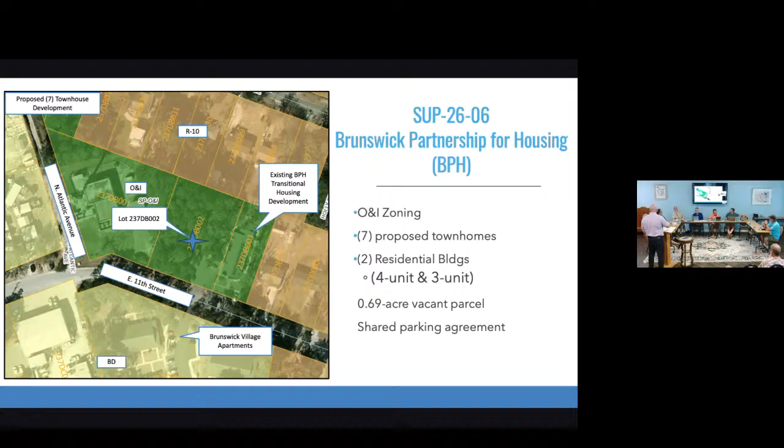So that is where -- geez, no, that's my problem. I was trying to fix the screen so you guys aren't seeing nothing. Well anyways, it's to the southeast of the subject lot.

Site locations. Sorry, can you go back on the slide? Okay, thank you, now we're on track. Site location: the proposed development is located along East 11th Street near North Atlantic Avenue.

It is served by existing utilities, and is outside of the special flood hazard area. It resides within the Office and Institutional zoning district, and is adjacent to the northwest and southeast by other O&I zoning district parcels. It is predominantly surrounded by residential uses, with R10 zoning to the north, and even though to the south is BD, that is the Brunswick Village Apartments, which is also residential. So it is predominantly surrounded by residential development.

Here we have 10.3.1 of the UDO. What we're really looking at here is the land use, multifamily dwelling, cross-referenced with the zoning district that will be incorporated, O&I, and we see the SS. For the audience that doesn't know, SS means in this situation that it is required to have special use permits, and the other S is that there are specific use standards that must go with this proposal, which we'll find at 3.7A of the UDO.

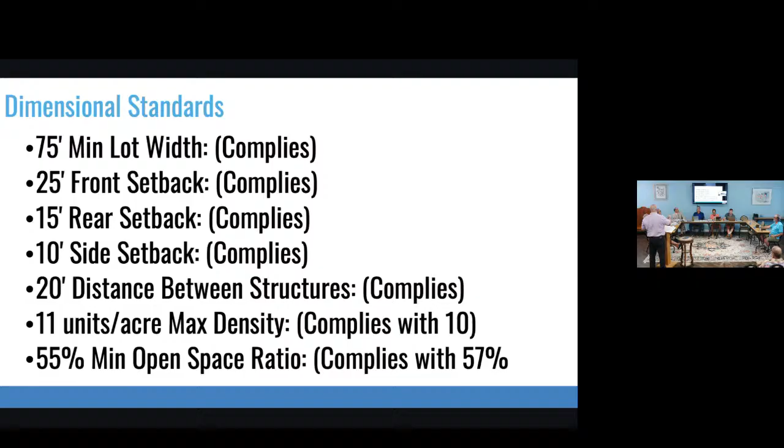So let me show you real quick. Basically, it's going to look like this from East 11th Street.

That's the street-facing side on both of them? That's the street-facing side, yes, sir. And building two, the 3-unit, that's the building closest to 11th. Yes, that's building 2 — you're standing in the middle of 11th looking at that, and that's what you see. Correct, on building 2, so that's facing us. So all that is to say they went out of their way, redeveloped, and came up with this proposal so they could be in accordance with the UDO standards.

While we're here, I'll show you the elevations that we have. This is building 1's elevation — as I mentioned, it's 4 units — and there's the side view of it. And here's building 2, again the front view up top, and the right elevation on the bottom.

Staff findings: the proposed development is found to be consistent with the O&I zoning intent, provides needed housing opportunities, meets density and dimensional standards, is compatible with the surrounding developments, and provides adequate parking and circulation. Staff recommends approval of the special use permit as the development is presented. If issued, the applicant will go before the June 18th planning board for the major site plan review, and I can answer any questions regarding the presentation or staff.

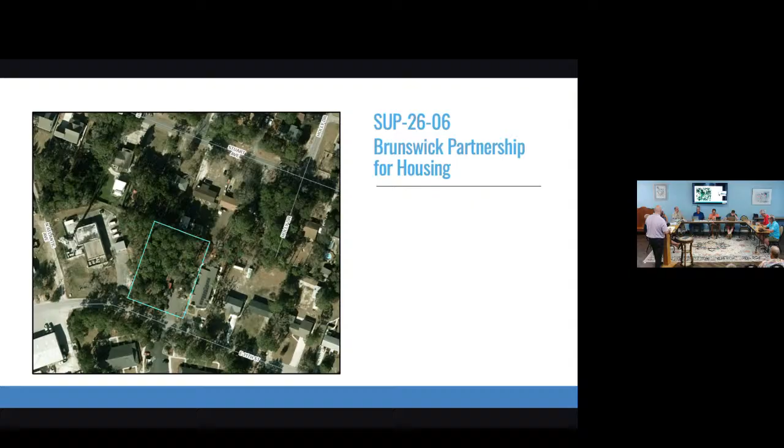Will the existing building now become part of the entire facility? Do they have access between the two? There's common sidewalks. The existing building on that parcel is going to remain separate, its own entity. They are owned by the same property owners, however, Brunswick Partnership for Housing owns both parcels.

If people are parking, are they going to park in the 23 parking spaces and go into the existing building? They could, that's what the parking agreement I was discussing earlier covers. As for sidewalk access, yes sir, there is sidewalk access.

Looking at trash, that was another thing we had to work through, that the developers worked through as far as design goes. We've run into a couple of problems with it. I believe, and they will correct me if I'm wrong, the trash is going to be individually placed in the back. I believe these are the receptacles for the trash right here. Is that correct? Yeah, rather than one primary receptacle.

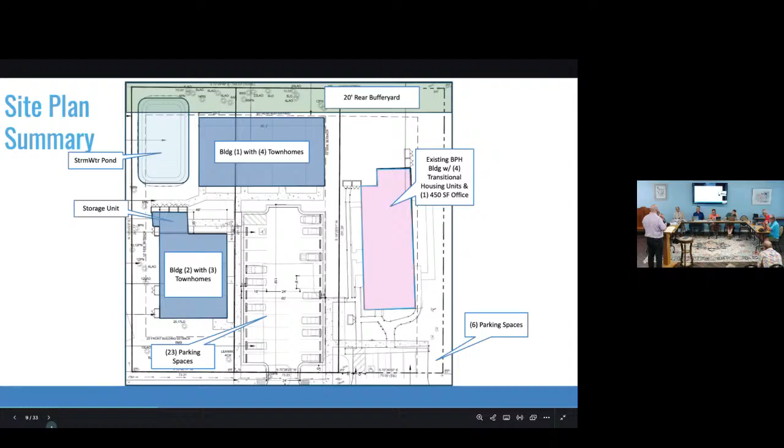What access is there, 11th Street or North Atlantic, how would they get to it? That would be the west parcel property line, let me show you. Is it a dumpster? They're going to be individual receptacles.

The problem we ran into is you can't have a dumpster in the front of the property, but there's no real location since they want to save a specimen tree out on the front property line. So they had to play with the design a little bit to accommodate that. If you look at the subject parcel, the left property line, that's where the trash will be facing. But again, they're going to be individual containers, not dumpsters.

Where's the road to pick it up at? They're going to wheel them down, there'll be a wheel-down truck. So all along 11th Street will be where they wheel it to?

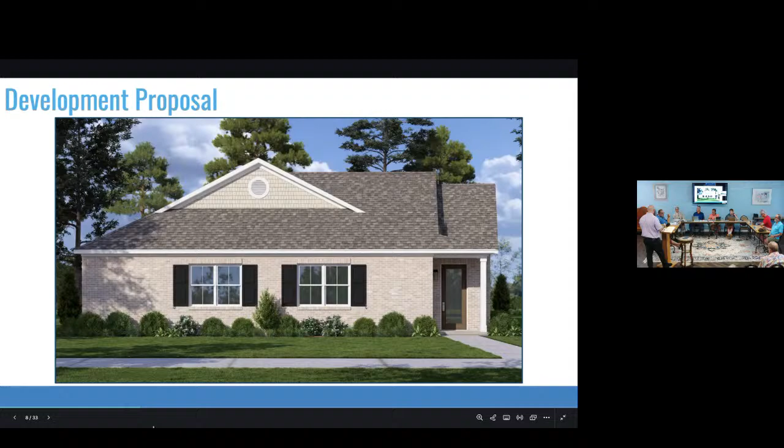Okay, I need to withdraw my question about the drainage. Got turned around in my head and thought we were on the other side of the street. I'm sorry. All right, Michelle.

What's that next to the left, going west, northwest? Oh, I don't know the full details, it's like an AT&T cellular transmitter. There's nothing residential there.

Because it's O&I, there's not a required buffer yard between it and the proposed development. However, because the northern properties are zoned R10, there is a 20-foot required buffer yard between the O&I and those parcels that they've accommodated.

Well, if that's all you have for me, then by all means, I can hang out for more. Yes sir, we've got plenty. By all means, just so you know, our applicant also has a presentation and they can speak more about the design and engineering side of things.

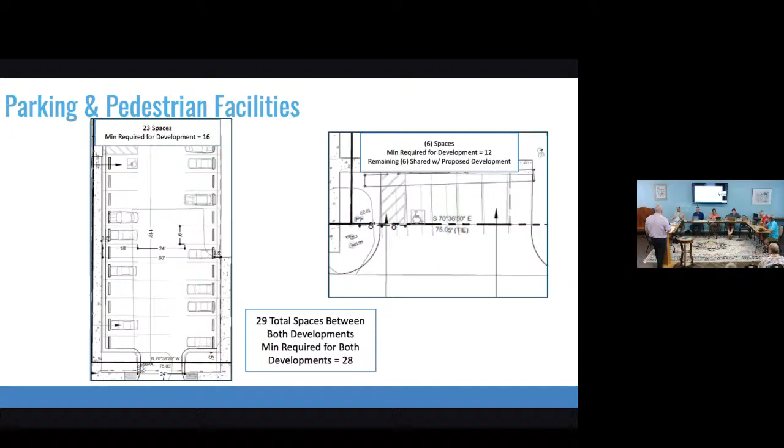Even though Jason withdrew his comment, it did raise a prompt for me. Could you go back to that image that shows the lot numbers, early on, it's got the trees and all that in plan view. If there was an easement to the north of the property, it would show. Like if there's a drainage easement, I just wanted to make sure it would show up on that map. That would be the map where it would show, right?

On the north side, where they show the 20-foot buffer, that green buffer, beyond that, if there was a storm drainage easement, that's where it would show on this map if it had been dedicated. That's why I wanted to clarify, when Jason mentioned it, I just wanted to go through that.

So the existing facility is transitional housing, if I'm not mistaken. The proposed is not. Just want to make sure. I think I read in here, and I'm not trying to go back in time and encumber the transitional development that's already there and in use, but we've had some issues come up before with what's going on with neighboring lots, parcels and uses. I think it's in here somewhere that transitional housing requires a rear fence. I just want to make mention of that.

So when you go through and start looking at that buffer treatment, and don't hold me to it, but I think there is a requirement for the rear yard of transitional housing to have an 8 foot tall fence. You can correct me if I missed it, but I thought I caught that in here somewhere. That's why I wanted to ask whether or not the new one was also going to be transitional housing.

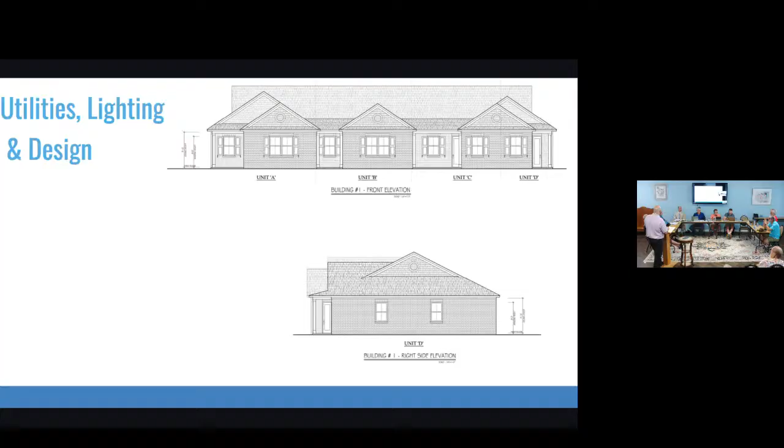So the setback is 15 feet. But because they're adjacent to an R10 lot to the rear, they need a buffer yard of 20 feet wide. I think that's right. Yes.

Give it, take it away.

No, I know. Okay. You know what depth and dimensions on the stormwater pond? I do not, I'll have to leave that to the applicant.

That's all I have. Thank you.

Okay, and we can always bring it back. Of course, okay, another question.

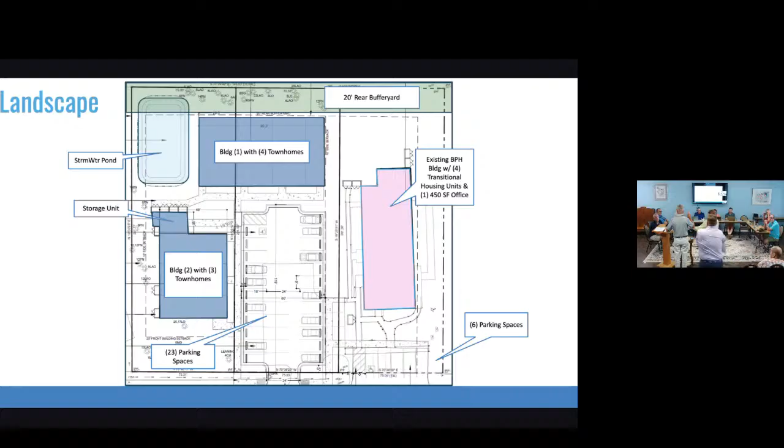You swear to tell the truth, the whole truth, and nothing but the truth, so help you God? I do. Thank you, sir. You swear to tell the truth, the whole truth, and nothing but the truth, so help you God? I do. Thank you.

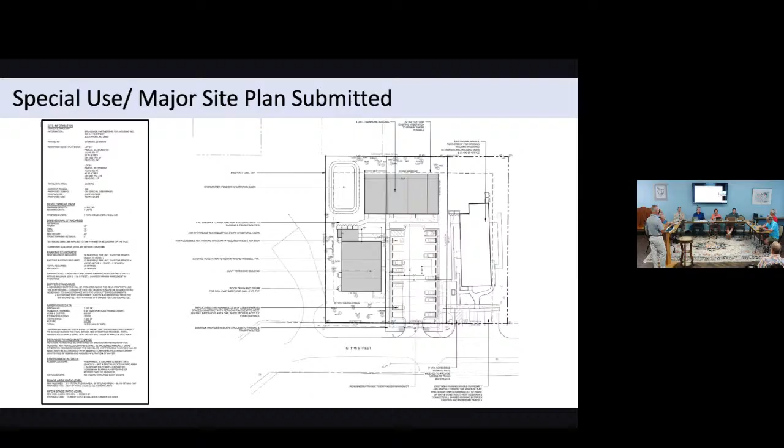It makes lot 50 and the proposed townhomes stand on their own as well, so they have joint ownership. Next slide.

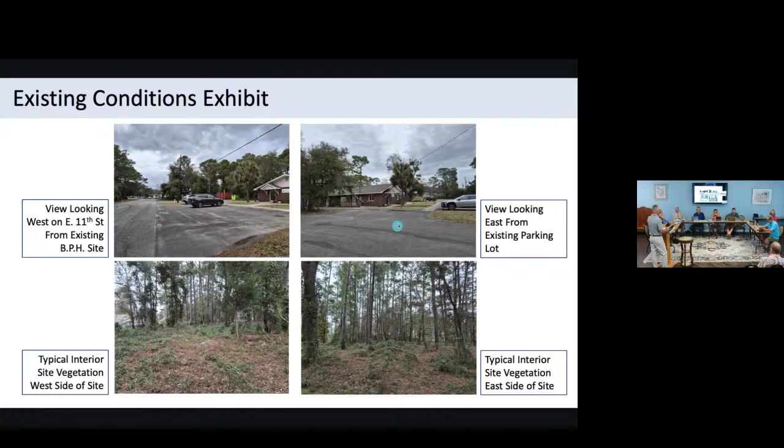This shows some pictures of what's currently there. It's very difficult to see in the upper left-hand corner at the front of the building, the other photo there.

So you see the gabling over our front entrance. Next to our sign is one window that's shuttered on either side.

Part of the UDO, looking at it, we wanted to make the new building substantially similar in architecture to the existing building. That was the goal we set out. Next slide.

So this is a rendering of the front building. As you can see, it's significantly similar—one door in front, in this case, with two shuttered windows on each side.

Both buildings will match the current building on lot 50 with brick. Even though it's going to be substantially newer, we think this design is a great bookend as you get into East 11th Street. You have very beautiful low-lying buildings that will seamlessly interface into our existing building, the same gabling you see on the rooftop, same style of building, and then into the residential neighborhood. So we think it's going to flow and integrate very nicely.

Again, if we weren't able to purchase the lot from AT&T, Mother Nature would be all you see in perpetuity.

So you have common ownership, and you have substantially similar architecture between the two parcels. However, that's where the similarities end.

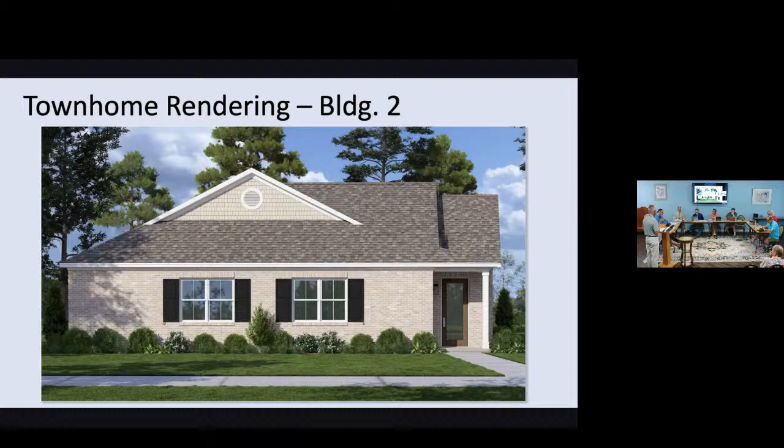I know you have some other questions. Let's see that landscape plan again—at the site plan, the landscaping.

You're separating the transitional housing from—well, not really, I guess there isn't. They're connected, I'm just saying. It looked to me like the tree line... Allison, I can see it—those are existing trees, yes sir.

I am a landscape architect and worked on the landscape plan here. So there are some existing trees being displaced by this parking lot expansion, and we're just trying to reestablish that canopy in the area—not necessarily to block out, just to get shade. My name is Allison Ingebretson with Paramount Engineering.

That concludes my presentation. We have common owners, very significant new similar architecture, but two very diverse uses on two separate parcels. And the one parcel, now called Lot 50, needs a special use permit as part of its zoning, and that's what we're here to ask for your approval today.

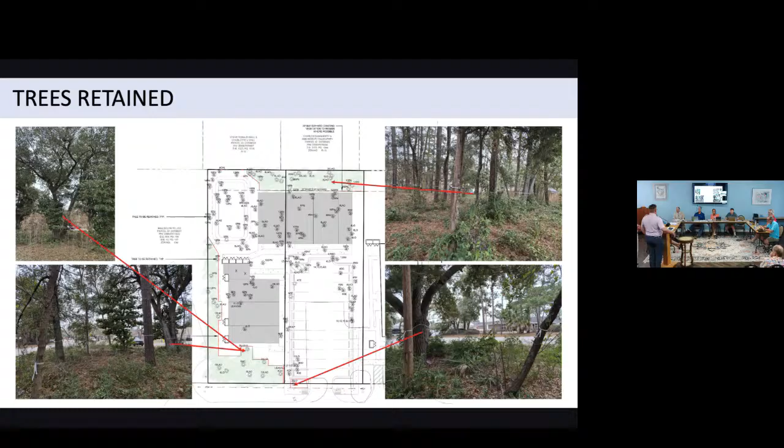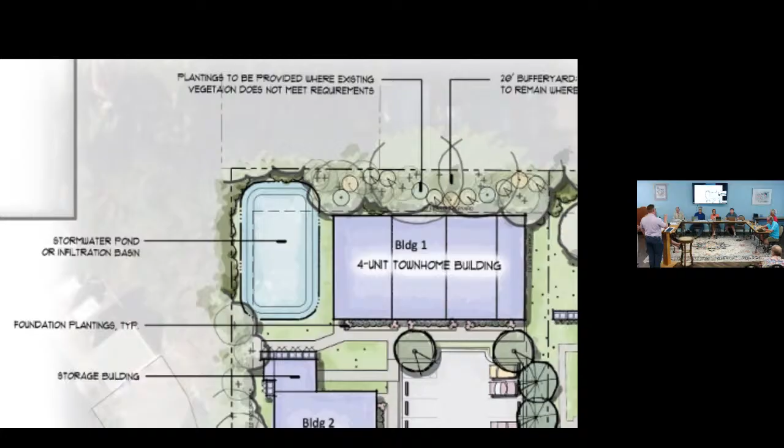I don't have the horizontal dimensions off the top of my head, but based on soil testing and preliminary design relative to meeting the requirements of Southport's stormwater ordinance, the stormwater facility in the back will be an infiltration basin, which is a requirement of the ordinance. It will be shallow, 2 to 3 feet deep, because the bottom of the basin must be maintained 2 feet above the seasonal high water table. The testing shows adequate depth to the seasonal high water table so the design can be put into place. Infiltration rates are favorable for this site such that infiltration is a viable technique. Also, outside of the building footprints, the remainder of the impervious or paved areas and sidewalks will be constructed with a pervious paving material and adequate stone depth below it to act as an infiltrative device in accordance with state and local requirements.

What do you got, the asphalt? It'll be pervious pavement instead of concrete? More likely a pervious concrete material.

So in the stormwater pond, 2 to 3 feet in the upper part, and the other part is what? Did I not hear that correctly? It will be uniform depth across.

Alligators can help, very important. You gotta do, we seem to have a housing shortage for them too. So we need to kill two birds with one stone. Ultimately, the design standard for infiltration devices is that it be dry most of the time, so hopefully for the residents' sake the alligators won't be so close by.

We don't have any plans either way there. There's not an ordinance requirement for fencing it, and it's not going to be deep enough or holding water to be a drowning hazard or a nuisance. So more than likely it won't be fenced, so it'll be open access for maintenance.

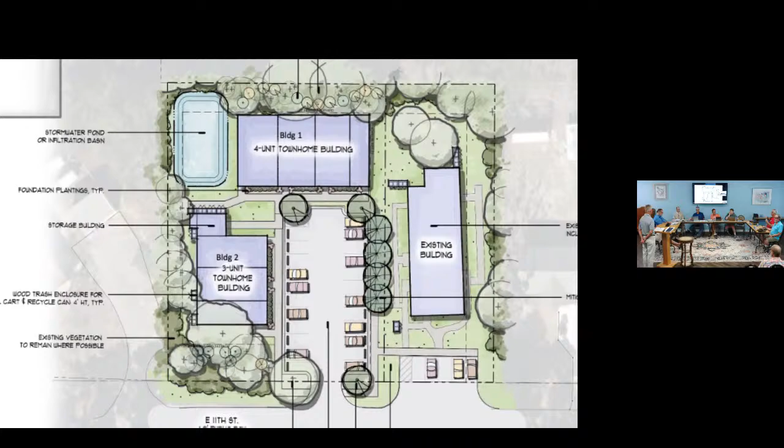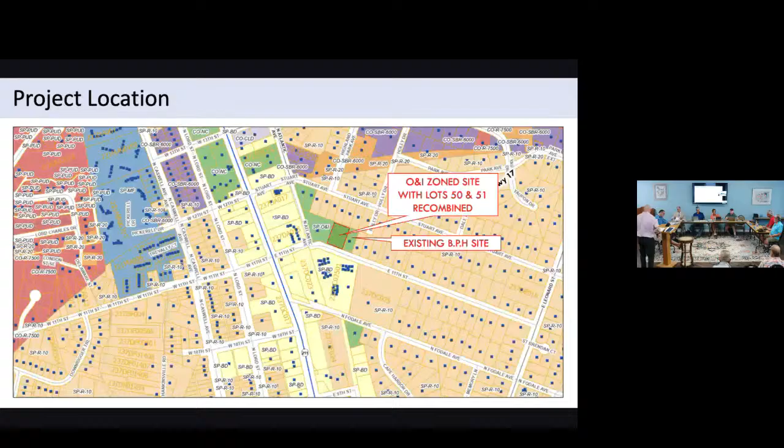Looking at the UDO, section 3.8, a transitional housing facility should be screened from adjacent properties. But it said an 8-foot fence adjacent to residential, obviously that wasn't residential prior, it is now. Does that affect anything? Because it's residential, I'm assuming you grant the SUP and the planning board grants the major site plan. Basically the buffer zone is for a proposed use going up against an existing land use. Now if for one reason those single land use R10s turn into something else, the onus on them to buffer against the residential use would be on them, but that's not likely.

I don't know if this is helpful, but in the back of the transitional housing facility there is a fence all the way around the back area. I was curious, being that this is residential now, or can they make it residential, would that allow it? Well, yeah, but it's a residential use, still in office and institutional zones.

Exactly, so if you look at the buffer yard table, for O and I to be adjacent to R10, there's a 20-foot buffer yard. But for an R10 adjacent to an O and I, there's no buffer yard requirement. So it would still stay O and I. Yes, this is how we saw it. The zoning is going to remain O and I.

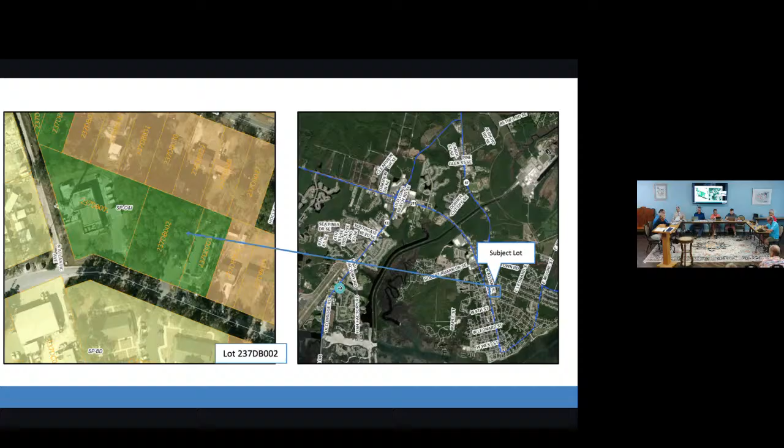Good, everybody good? Yes, sir. I'm going to go ahead and close the public hearing. Any discussion? Well, then I will entertain motions.

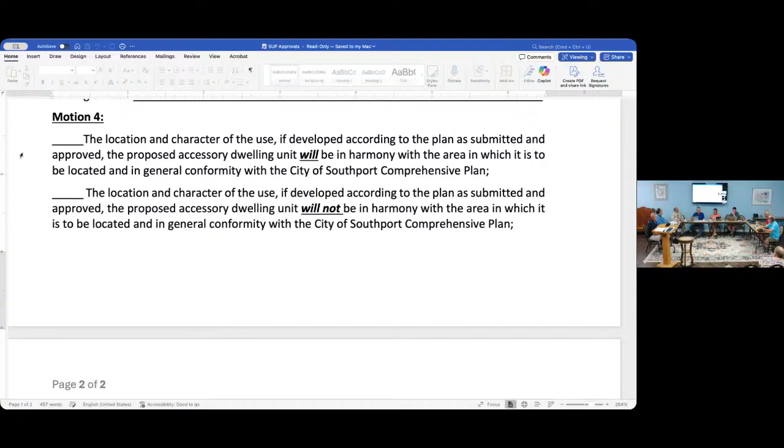I move we recommend approval of the special use application with no condition. Second. Chris, thank you. All in favor, signify by saying aye. Aye. Opposed, same sign. Motion carries.

Well, it's been approved. And I, for one, speaking for myself, appreciate what you do. Absolutely, and what you are doing, because it's a much needed thing here in this area. We appreciate it. Thanks for sharing the plan, how it works. I think that's really, yeah, that's good stuff. Yeah, thank you on behalf of the board, we appreciate y'all. Thank you. Thank you for your support. Thank you.

Okay, we're going to move to business.

I brought this up at the last meeting about Mr. Fitzgerald's building he built. He had trouble with flooding, and I raised the question on it. I said they wanted him to get an engineer for the flooding, to find out if it was their fault. He did pay somebody and got an engineer to do the study, and he said Mr. Fitzgerald probably did flood their property. Now they spent some money on there and did all this, but I'm just wondering how we didn't get a vote on that because of the flooding.